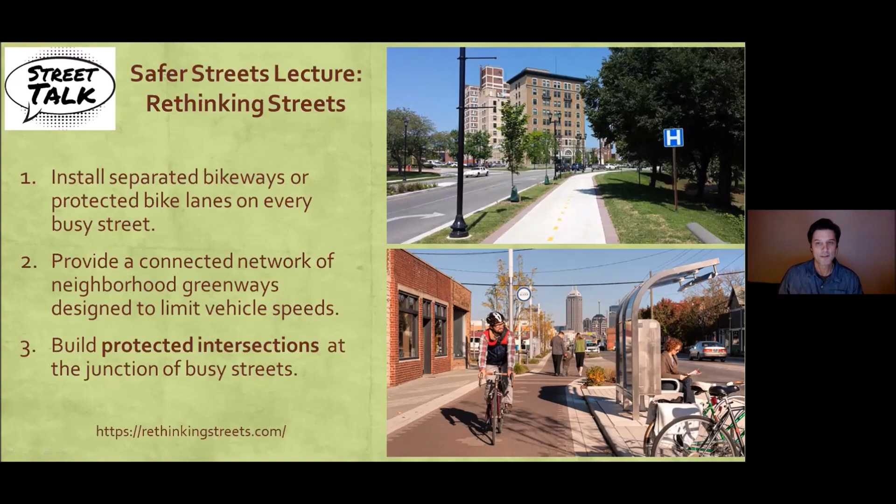In their collision reports, the police recorded the human behavior that led to the collision. Two-thirds of them were caused by a motor vehicle driver making a mistake at an intersection and striking a person walking or biking. We could focus on that human error, the mistakes the driver, the cyclist, or the pedestrian makes. In fact, that's what a lot of traffic engineers do after a crash or a collision.

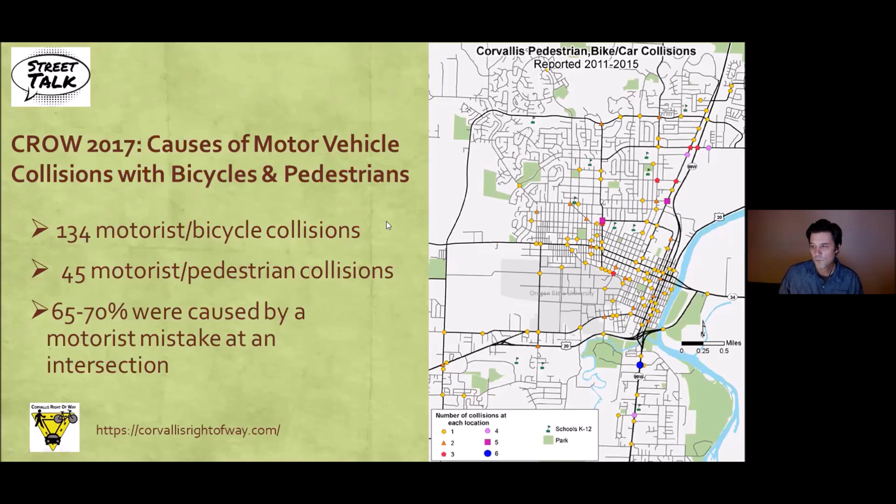But instead, I'd like to refocus our attention on a fundamental safety principle of the Dutch Institute for Road Safety Research. Humans make errors and willingly or unwillingly break rules. This is a given that cannot be changed. So roads and streets should be designed in such a way that this natural human behavior does not lead to crashes or injuries. So how can this safety principle be applied to the design of intersections?

How does a city even begin to implement intersections that are safer for everyone and encourage biking and walking? Well, these are perfect questions for our street talk speaker. His talk is entitled Intersections for People: Design, Implementation, and Community Benefits.

When I asked local experts who I should try to get to give a talk about intersections, they all said, get Nick. Nick Falbo is a senior transportation planner at the Portland Bureau of Transportation. He specializes in the design of urban transportation networks, spaces for people, and multimodal complete streets. Nick contributed to and illustrated the NACTO Urban Bikeway Design Guide, which is the standard for integrating bikeways into the fabric of American cities. He has popularized the design concept of protected intersections for bicyclists and serves as guest lecturer at the Initiative for Bicycle and Pedestrian Innovation at Portland State University. I'm very pleased to welcome Nick Falbo.

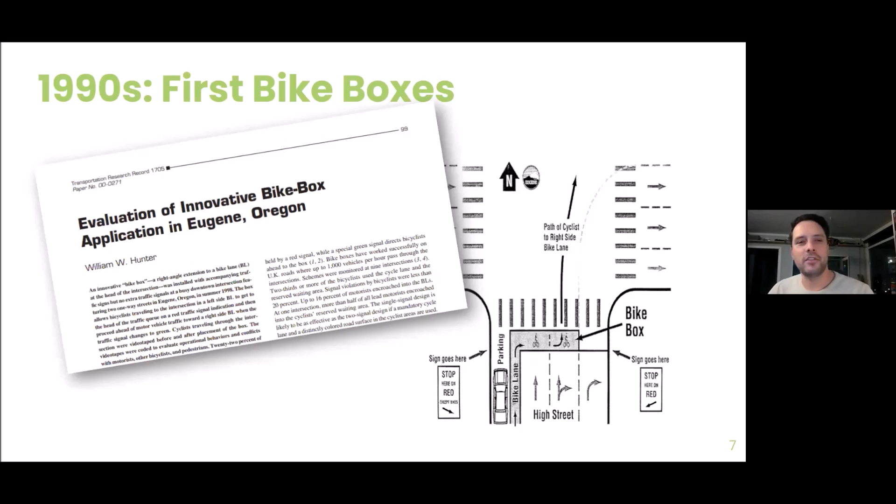It's probably the reason Corvallis has many of the bike lanes on its arterial streets today. In the 90s, cities like Eugene were experimenting with bike boxes as a traffic safety feature to improve bicycle transportation. Also around the turn of the 90s and 2000s, Portland was leading the way with experiments in colored bicycle lanes. For those of you who were around, we had blue bike lanes back then, following the Danish model. The evidence built by this work supported what is now the color green for bike lanes that we're seeing in cities all across the country.

And now we're trying to just follow in those footsteps in bringing more innovation into our cities. Since being pitched in 2014, this design has really taken off with official endorsement by FHWA and a little bit of an arms race among cities to incorporate this protected intersection design into their projects.

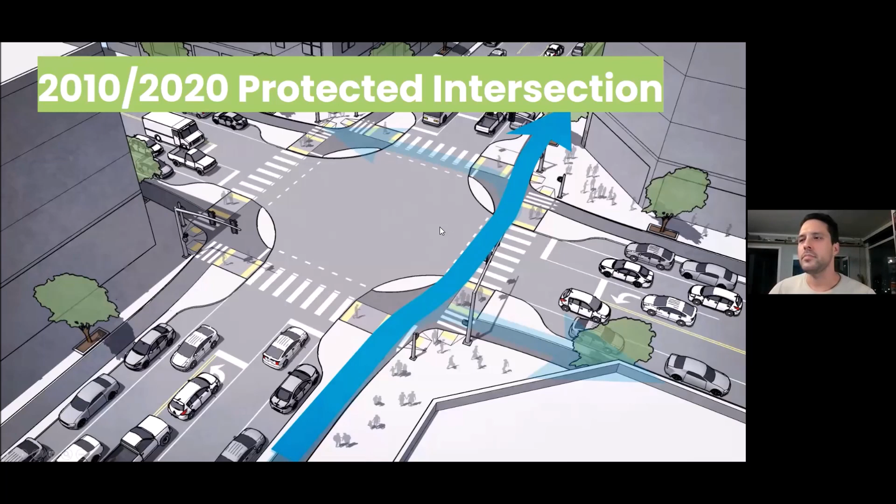But in our quest to design for the future, I find it really helpful to center ourselves in the past, to understand where we came from and how we got to where we are today, and what that means about where we can go in the future.

To illustrate this, I've got a chart dug up from a report in 1970 or 1972. This chart shows the relative usage of transportation modes in Portland for 150 years, since the beginning of the city in 1840. It was developed as part of a freeway environmental impact statement. Each line represents a different mode of transportation as it goes from the beginning of Portland to what was the present in 1970, or maybe 1974.

You can see the beginning of Portland, it's all pedestrians, horses, and boats. These modes shifted and grew as the city expanded. But then technology changes introduced other modes of transportation. Around 1870-1880 was the rise of railroads that helped connect cities, and the streetcar that helped expand cities. That had a rise until around 1920, peaking as the heyday of the streetcar era, then dropping back down and being replaced, in this case, by automobiles.

This was developed as part of the plan for a freeway. It had a goal, which was to convince you that the domination of the automobile was undeniable and inevitable. And this empty space here leading to 1990 really begs you to fill it with more cars and less of everything else.

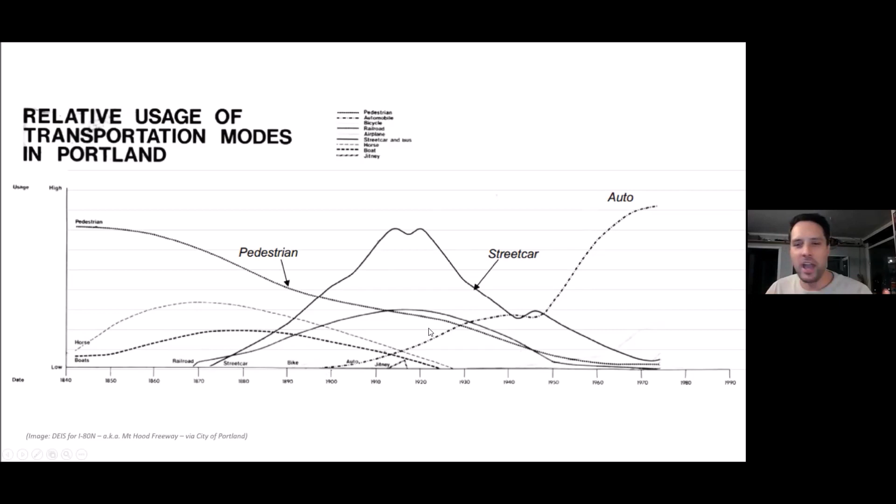But I take away a little bit of a different story from this chart. I see a story of change. I see that cities are changing all the time, and we get so lost in what feels like the status quo that we forget stability is the exception. I also notice how fast things can change. Within a lifetime, whole ways of traveling basically vanished and whole new ways of living emerged.

So I asked, well, what comes next? I really love this chart, and I wanted to see what happened since 1970. So I dug up some census data to try to figure that out. And while the original chart wasn't necessarily a scientific chart, it actually seemed to track pretty well with what I was seeing in census numbers.

So I filled it out, added the gaps where I could, and then extended it even into the future. This is pulling out lines that I've then projected to the city of Portland's mode share targets for the year 2035.

And what this tells me is that there is hope. History tells us that things can change quickly, and some of our mode share targets for the city of Portland that maybe seem a little crazy, when put into the perspective of the last 150 years, look a little more realistic.

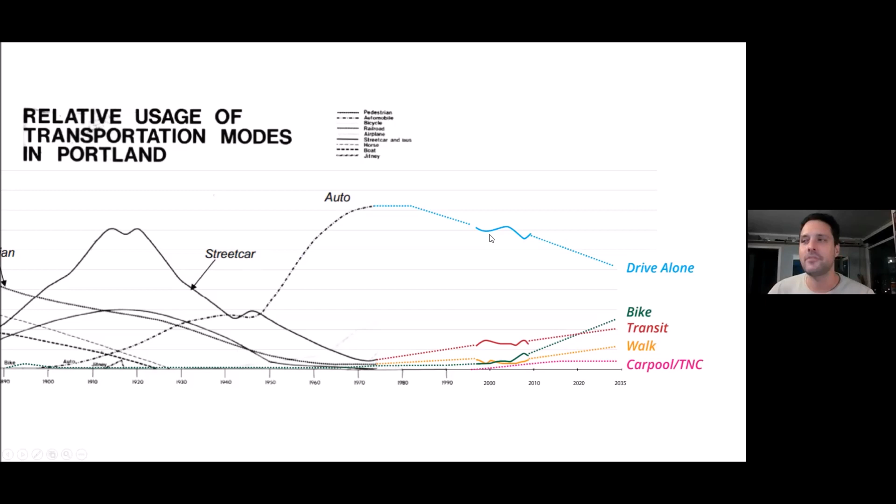These were the types of ideas and infrastructure that we started to experiment with in the 70s, and we've been talking about it for 50 years. These experiments were quickly abandoned and then largely forgotten. Not only that, we started to document these ideas also in a way that has largely been forgotten.

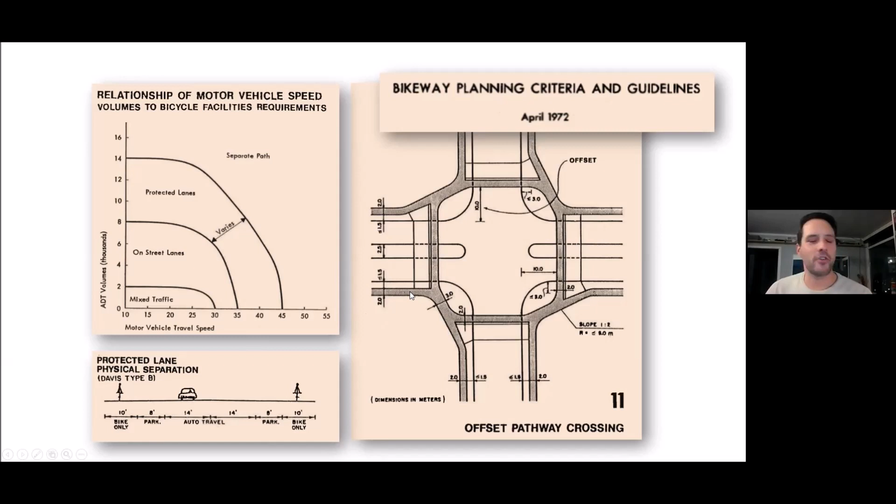This was something that people had been thinking about, and it hadn't quite landed. I would like to think that we're now in a position to move forward with these ideas, but it's very humbling to see where these came from and to know that we're building on the back of a long history.

Our objective right now in transportation planning and design is often geared at trying to reduce the impacts of driving or to reduce driving itself. Whether your cause is traffic safety, pollution, urban noise, or global climate change, dependency on driving is the problem. And designing streets and intersections where transportation outside of a car is safe, available, and attractive is the solution.

To do this, we need to start approaching things differently when we're doing transportation design. We need to switch from a passive approach to street design to a proactive approach. The NACTO Urban Street Design Guide describes how these approaches are different.

Passive design is built on our understanding of the present and our patterns from the past. It uses past traffic counts, present traffic counts, and projects out to the future. We design for the worst case scenario in terms of traffic or user behavior, and we design based off of standards rather than the context we're in.

And the traditional rules are full of self-fulfilling prophecies, having to do with clear zones that try to make us safer but just make us go faster, or 85% speed rules that let us increase the speed limit because people want to drive faster, creating a never-ending feedback loop.

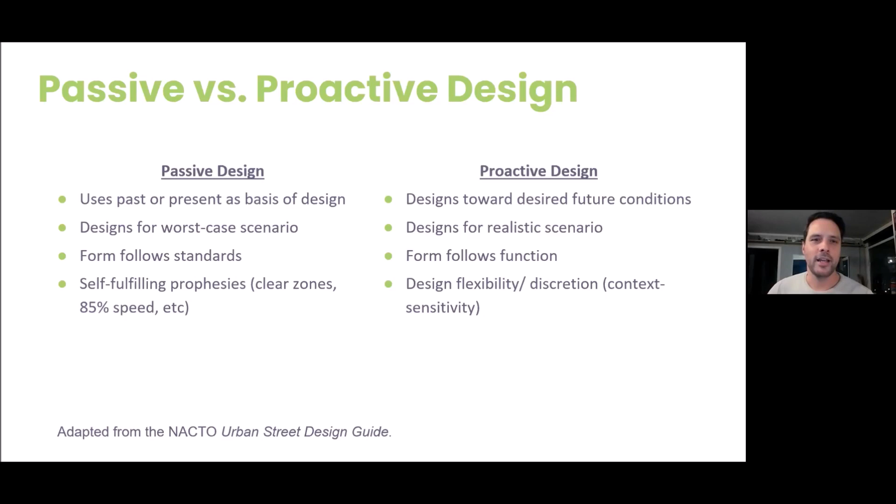A proactive design is much more intentional, and it starts to turn these on their head. I think the most important element to start shifting towards is to design toward the future conditions that you want. We need to be saying that we want more people walking and design a street that would encourage more people to walk. We need to be saying that we want more people biking and design a street that encourages more people to bike.

Like stormwater engineering, where you need a big pipe to move the extreme amount of water for a one big day event, or architecture where you're designing for potential earthquakes. But it's disastrous when you apply these ideas to normal city streets.

Over-designed buffers, clear zones, and setbacks are not only designed to account for crashes, but they end up encouraging unsafe speeds and create more dangerous crashes than ever before.

But proactive design recognizes that human behavior is what governs traffic engineering, and that it is fundamentally adaptable and not fixed. People adapt to their conditions. Changing streets changes behavior. And designing for the fastest is creating more fast drivers.

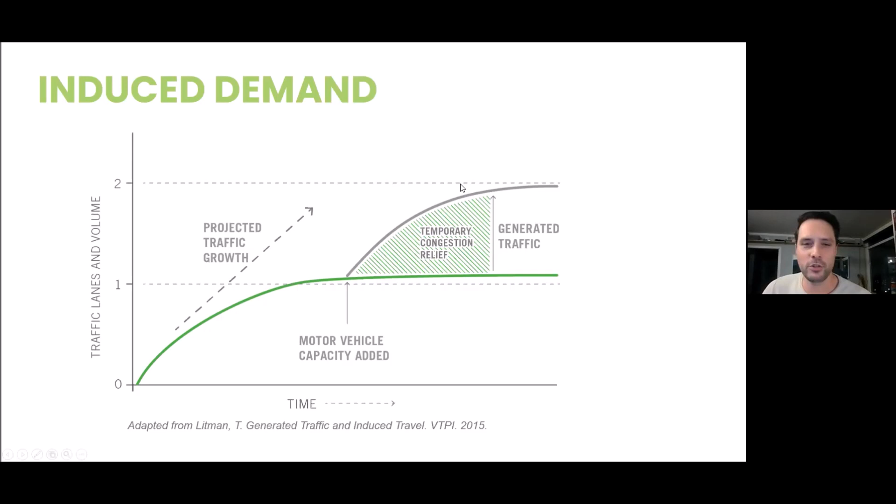These projects offer an illusion of relief at first, but are quickly filled up with new people and new trips. This shows motor vehicle capacity at a one-lane street, but with projected traffic growth, more than this street can handle. Had we just left it alone, that traffic growth would never have shown up. But by building for this future, we get this future.

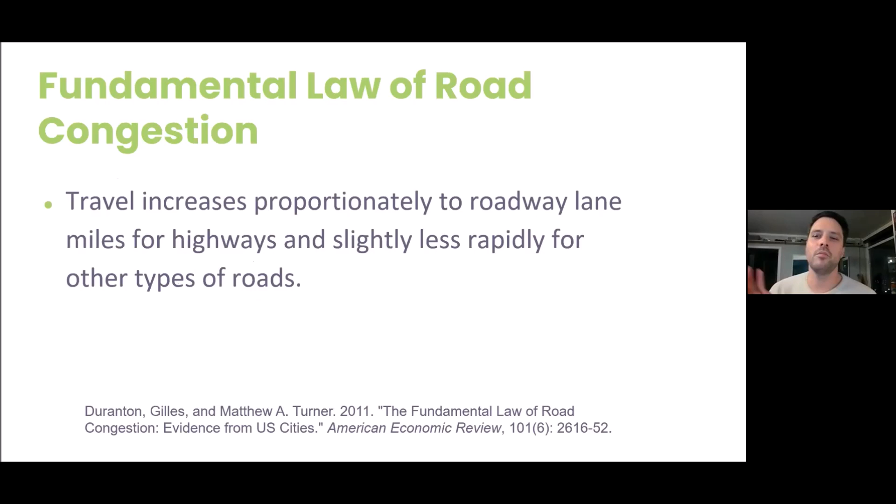This has been studied so much that it's called the fundamental law of road congestion. Travel increases proportionately to roadway lane miles for highways, and slightly less rapidly for other types of roads. When you expand roads, you get more traffic, and now we're just as congested as before, with even more motor vehicles on the road and everywhere else in your city.

Maybe the poster child for this is the Katy Freeway in Houston, Texas. This is incredible - they widened it from 8 lanes to 23 lanes for a cost of almost $3 billion. The goal was congestion relief, but it didn't work. After construction, travel time along the corridor increased by more than 18 minutes, a 33% increase over pre-widening travel times. Now they have more people stuck in more traffic.

While this is a big project and we can understand how big projects can influence people's behavior in a big way, this same general philosophy applies to our local streets as well. When we've got an arterial street and a big intersection, the more we're facilitating auto movement, that contributes to the very same dynamic as this freeway widening - easing the mode of driving while simultaneously making everything else that much worse. So the real question is, can this work in reverse?

Can we go from induced traffic to reduced traffic? This is sometimes called traffic suppression, traffic evaporation, or disappearing traffic - the intentional reduction of lane capacity on congested streets as a way to limit and reduce traffic in our cities, and most importantly, to free up space for multimodal mobility. This isn't just a normal road diet. Road diets are great and we need to be doing them, but they're generally only recommended in areas where traffic volumes aren't too high and the impacts are small.

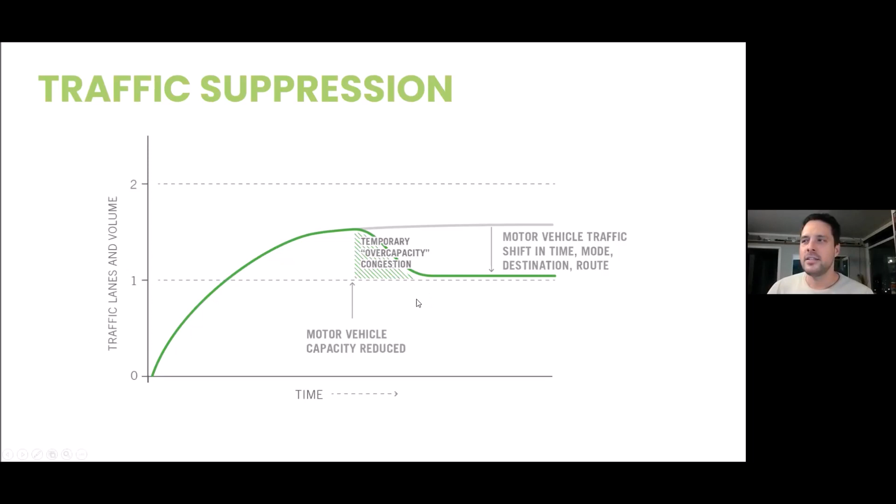This has been studied quite a bit, mostly in the UK. One study in particular, led by Sally Cairns in the early 2000s, looked at over 60 examples of motor vehicle capacity reductions in congested corridors. She looked at construction projects - long-term projects that reduced capacity of major roadways to see what would happen. She also looked at disaster projects, like in San Francisco, where a whole freeway collapsed during the 1989 Loma Prieta earthquake.

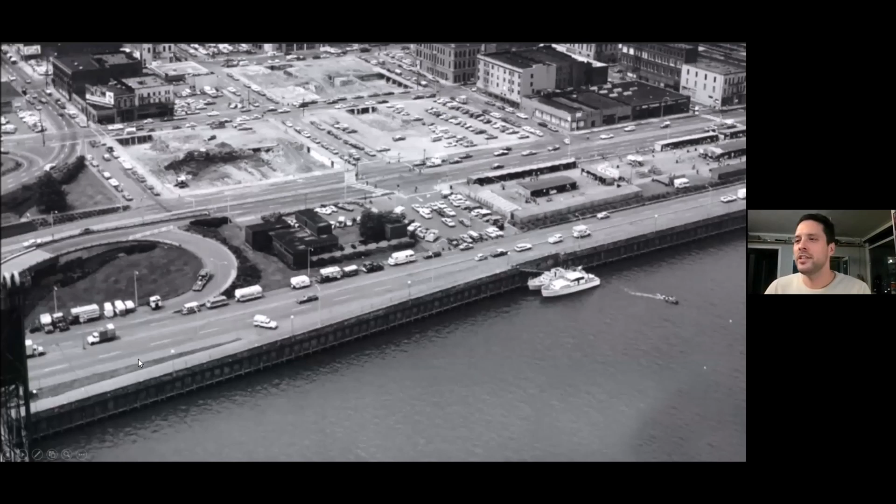It was replaced with a street that carried far less traffic. She also looked at intentional policy choices. We've got a great example of this in Portland, where we removed Harbor Drive Freeway along our western waterfront. In 1968, the road carried 25,000 vehicles per day. It was expected to increase to 90,000 by 1990, but they removed it in 1974, and in its place built a wonderfully loved park. Rather than seeing more traffic onto adjacent streets, the removal saw 9.6% fewer motor vehicle trips across downtown bridges.

Her study identified the following conclusions: when road space for cars is reallocated, traffic problems are usually far less serious than predicted. Overall traffic levels can reduce by significant amounts - she notes anywhere between 25 to 50% of the diverted traffic appears to simply vanish from the network. People react to changes in road conditions in a much more complex way than has traditionally been assumed by traffic models. We need to treat people as the more flexible people that we are, and we make rational choices in the face of rational changes.

I'm sharing this with you because we really need to find ways to wrestle our cities back from cars. We're going to have to make hard decisions and move into a new way of thinking about what kinds of change is possible.

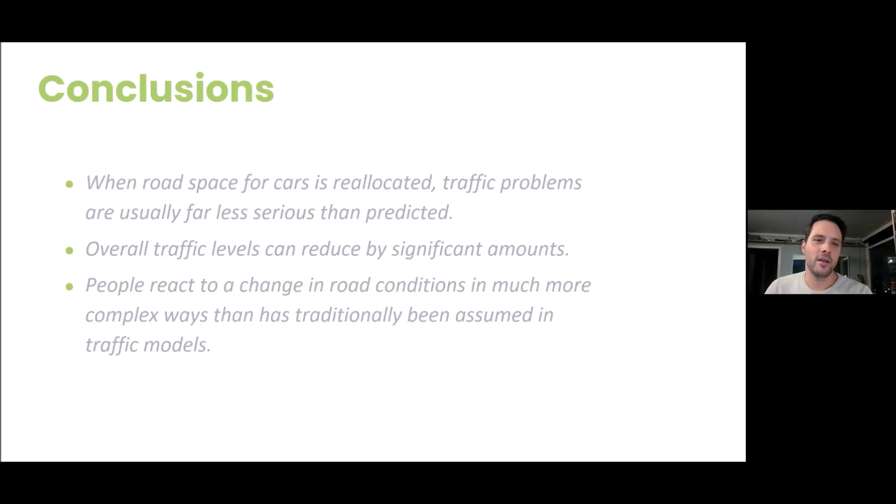So getting back to bicycling and intersection design, guiding our work in Portland is the belief that bicycling should not require bravery. This was coined by Portland's bicycle coordinator, Roger Geller, in his paper, The 4 Types of Cyclists, published in 2009. In this paper, he sets the foundation for understanding not just what we're designing - protected bike lanes or neighborhood greenway streets - but more importantly, who we're designing for.

Today, his framework is fully endorsed by the FHWA and verified nationally by researchers at PSU. It breaks users into different types of bicycle riders: the interested but concerned, the somewhat confident, and the highly confident. These groups have varying degrees of stress tolerance, and you can really see their makeup on our city streets today. Most cities are really only operating in this highly confident territory because they don't have a built-out network that is lower stress.

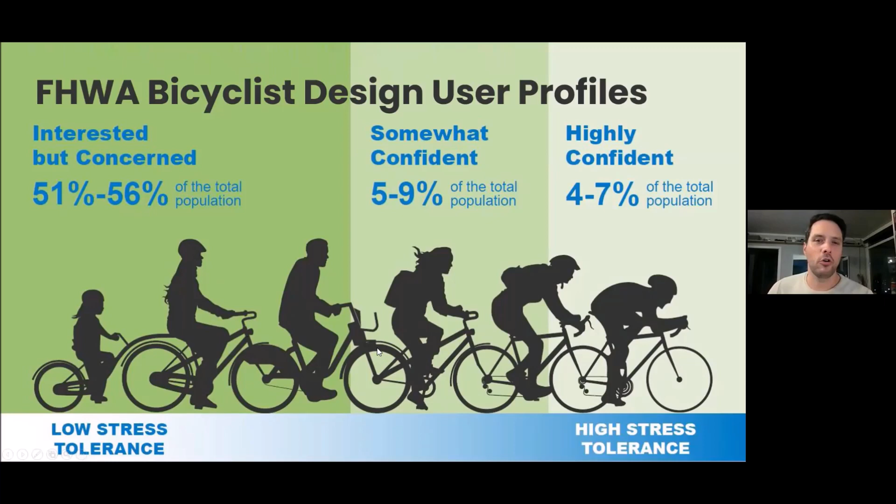A lot of bike-friendly cities have embraced the somewhat confident riders, Portland included, which is a growing share of the population, but really we're not quite getting there yet. The key to a transformative future is attracting the interested but concerned to our streets, and they require low stress facilities. The interested but concerned includes everyday people doing everyday things, running errands or going shopping. You've got kids traveling independently. This is where we're going to be meeting the needs of the majority of people in our cities.

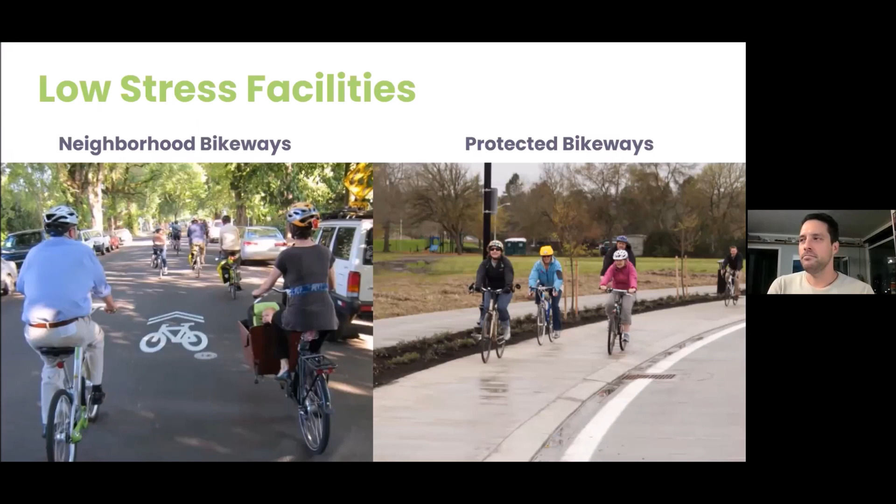To reach this crowd, it really leaves us with two options. We've got neighborhood bikeways for our residential streets, our neighborhood streets, and protected bikeways for our busy streets. Protected bike lanes are located next to the road and physically separated, providing people with the confidence to bike to work, school, markets, parks, and restaurants, or just explore on the weekends. This passage comes from People for Bikes and their Activating Support for Bike Infrastructure resource page.

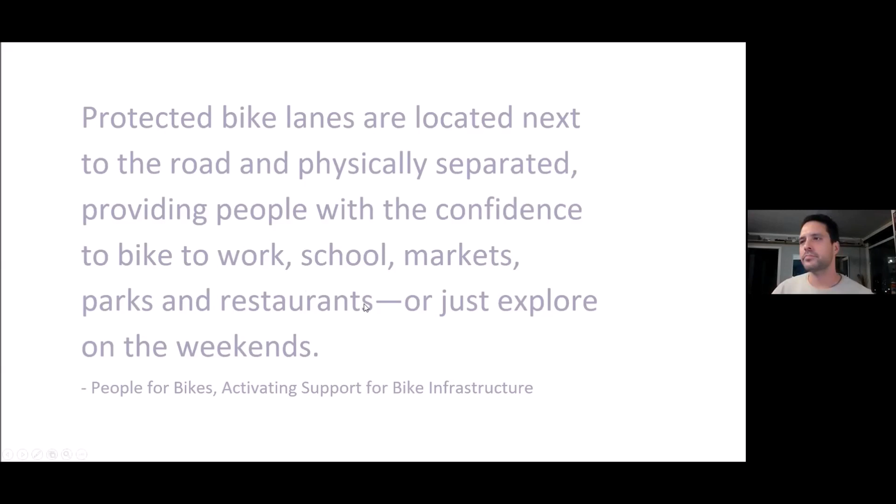It's got great messaging that you might want to think about adopting as you're talking with the community about why these types of facilities and intersections are needed. But we know we can't just build one or two great protected bike lanes. We need to create a network that connects people from where they are to where they want to go. To illustrate this effect, I'm going to point to Portland.

In 1990, our bike network was minimal, and so was our bike ridership levels. The network, which you can see in these black lines across the city, didn't connect very well, and you couldn't get to everywhere you needed to go. The densest part of our network development was in Southeast Portland, which is also where bike commute activity ended up being the highest. After 20 years of intentional development of new neighborhood greenways and new bike lanes, everything changed.

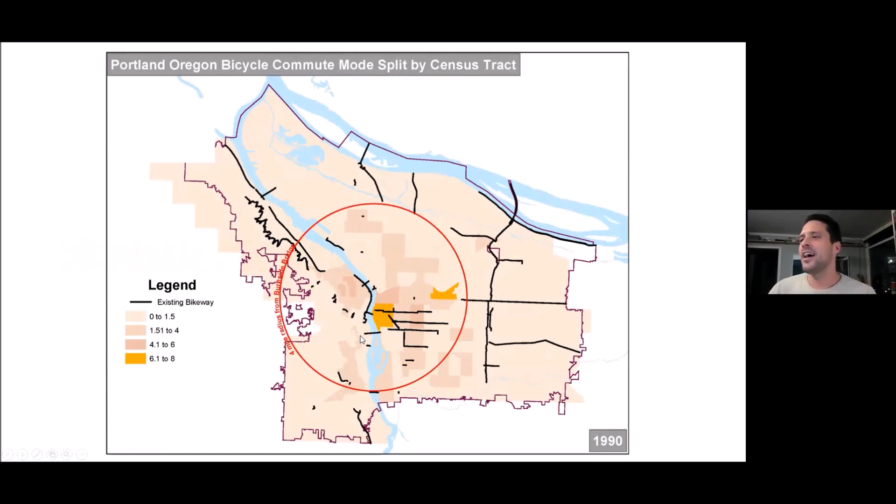By 2012, we'd done a dramatic expansion of our bikeway network in these inner neighborhoods, and came along with it a dramatic increase in bicycling within this area. It's pretty incredible. Some of these neighborhoods clock over 25% bike commute mode share. This is an incredible statistic, and it's on par with some European cities. You can see that where we're building the network is where we're seeing the riding.

I think our next frontier is East Portland. We've been spending a lot of time trying to build out in the more suburban development portion of our city. These black lines, a lot of these are skinny painted bike lanes on arterial streets, on 5-lane streets, and they are not doing the job. That's pretty clear just from a map like this. So we're doing a lot to try to upgrade these facilities to bring low stress bicycling into the area.

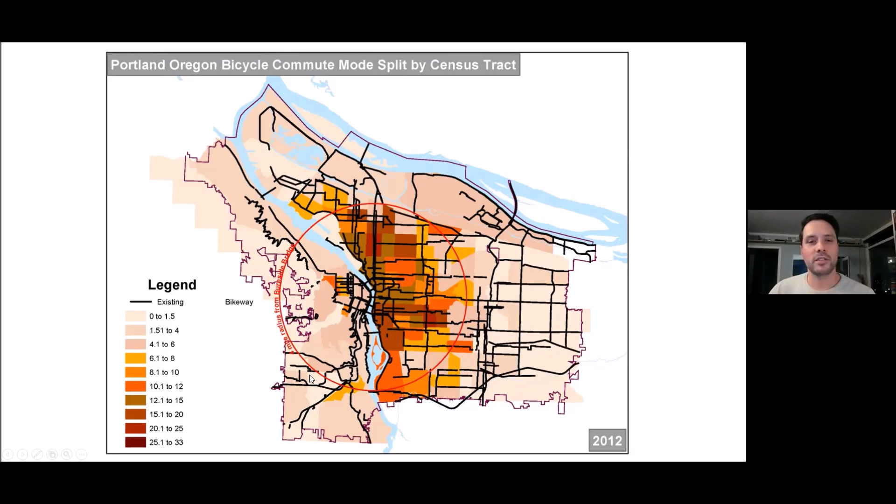This is really the challenge for Corvallis. With luck, we'll start to see these types of networks of connected, protected bike lanes and neighborhood greenways built here. The blue lines are all kind of local streets that could be calmed to become neighborhood bikeways. These red lines are your busy streets, your high stress streets. These are the streets where we're going to need to work to get separated bike lanes to create a street that feels safe for everyone.

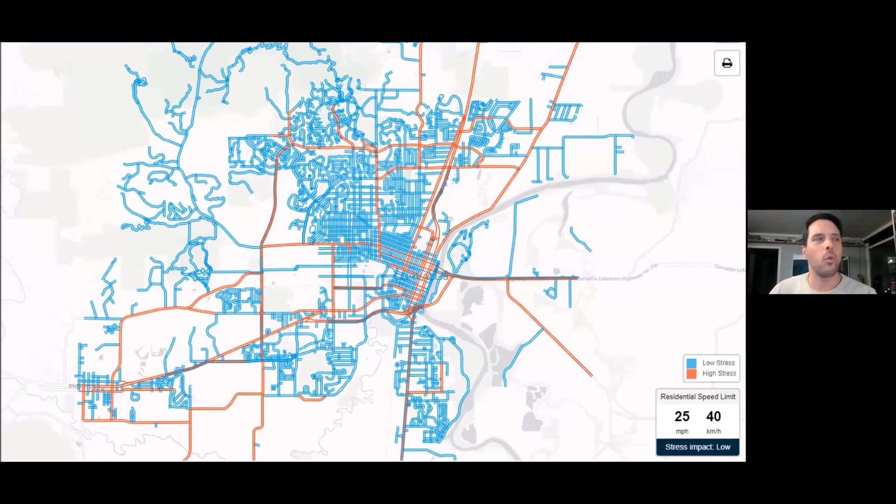As you start to build out this network, you're going to run into questions about what do you do about the intersections. This is where we get into intersections today. Even the best road diet or bike lane can lose their benefits when you get to an intersection. Intersections at their worst really ruin the facilities that they're on, and they're not great places. Intersections can be confusing, often with a lack of clarity about how you get to where you're going. This is especially true for people walking and biking.

If you're on a big, busy street, how do I turn left? How do I make this connection? How do I get to this path across the street? They can be stressful with activity coming at you from all sides. You can feel exposed with long crossing distances to cross these wide multi-lane arterial streets. And they can also be dangerous places.

In Portland, 71% of all pedestrian crashes occur at intersections, and 44% of all pedestrian crashes occur at signalized intersections. We often think of signals as maybe the answer to a lot of our safety problems, but signalization alone is not necessarily going to fix the problem. This reality really drives Portland's Vision Zero initiative, which has identified our most dangerous intersections for prioritization of safety fixes.

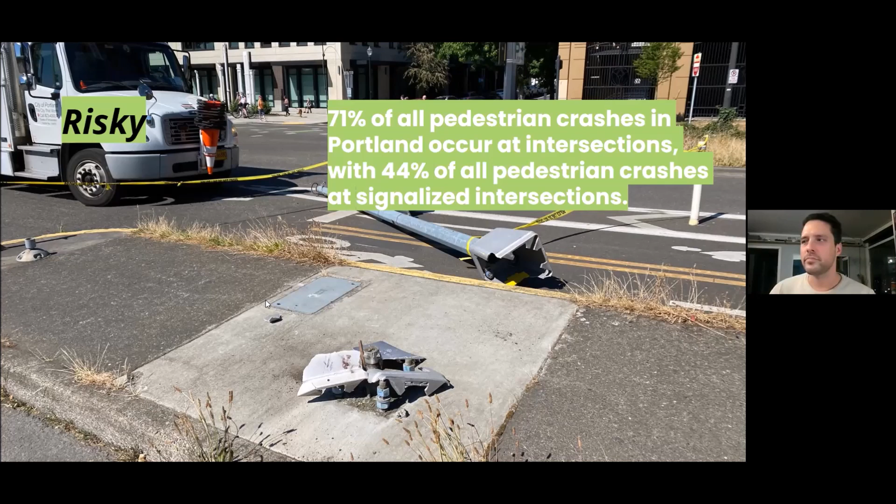Intersections can also be places where people are breaking rules, maybe intentionally, maybe not. How many of you have tried to cross the street and had no driver yield to you so you could safely cross? A study out of PSU found that poor yielding rates are common. Drivers don't yield to pedestrians in general, and they are even less likely to stop for and more likely to crowd Black pedestrians. This becomes a real issue of equity in engineering. We can design a crossing to create more yielding and more equitable outcomes, and we should.

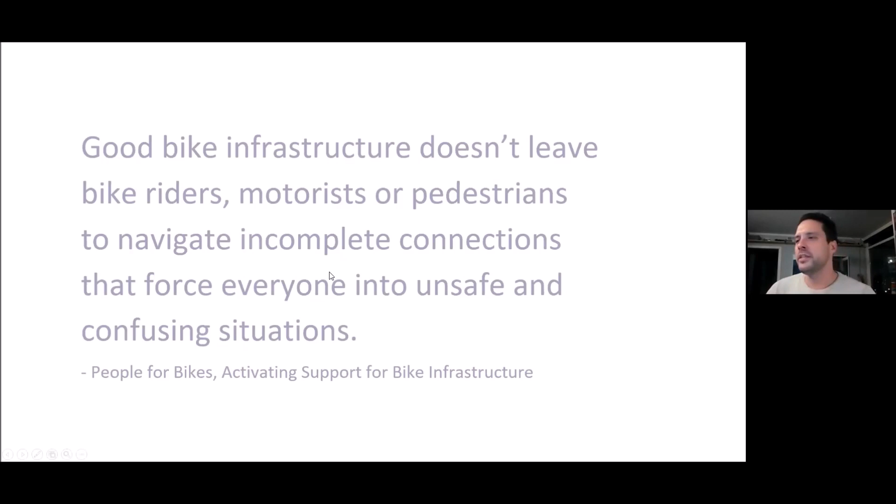So today we're here to talk about not giving up at the intersection. Good bike infrastructure doesn't leave bike riders, motorists, or pedestrians to navigate incomplete connections that force everyone into unsafe and confusing situations. Too often that's exactly what we do. It really doesn't matter if you've got a great protected or buffered bike lane, if the protection and markings all go away at intersections and you're left to fend for yourself.

There are 5 core intersection design principles to keep in mind when developing, reviewing, or commenting on intersection designs. We often don't get these things right. It's not always easy, but this is something you can use as you're evaluating the work being done in your city. The first is to provide adequate sight distance—you want to give people walking, biking, and driving a chance to see each other. But when your vision is blocked by parking or you don't have the space, you don't really have a chance to do the right thing, to stop fast enough, or to even realize you should be looking.

And secondly—you want to minimize exposure to conflicts. We do this often by narrowing the roadway or the crossing, by simplifying the crossing to minimize any mixing and sharing on our busy streets.

You want to reduce speeds at conflict points. Some busy streets have high speed limits—that may be okay for uninterrupted stretches, but it's not okay in areas where people are mixing or sharing with people biking. It's not okay where drivers are turning across pedestrian crosswalks at high speeds. Slower is safer, and by slowing speeds down, you give everyone the chance to react.

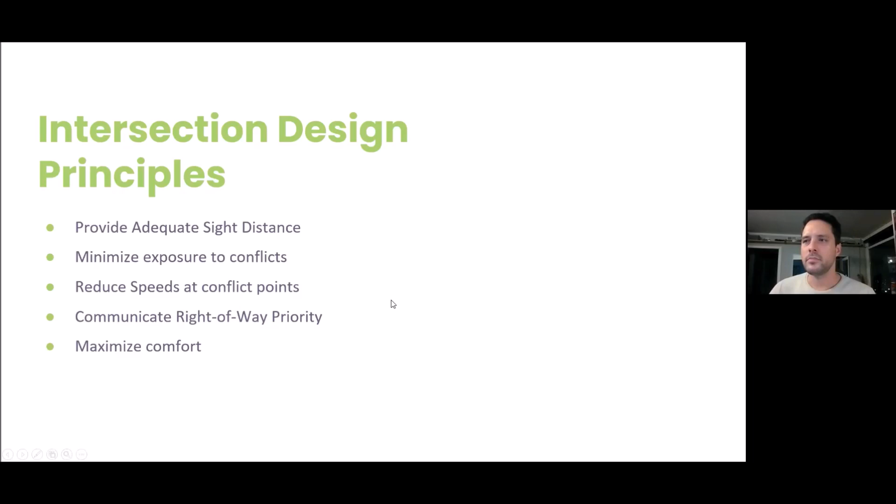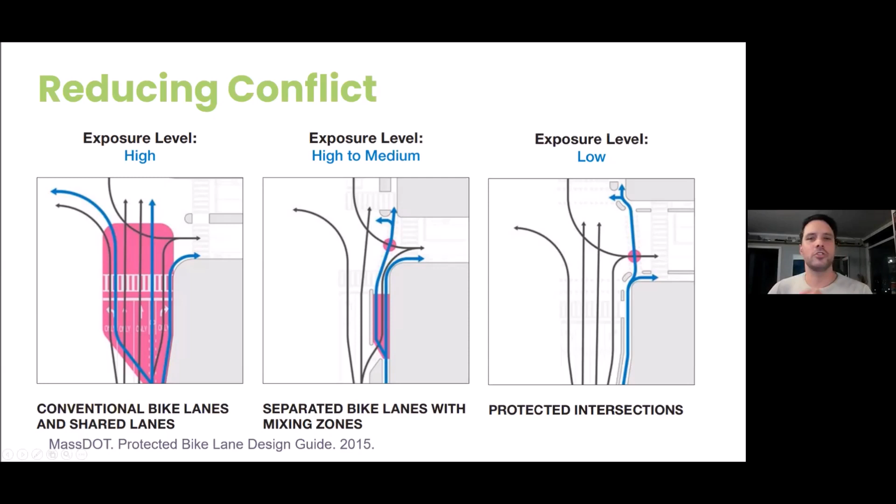Well, the first thing you really should do, if you can, is put this road on a road diet. We're not going to be able to create the world we need if we're constantly widening roads or leaving ourselves just the crumbs to design with. I think you'll find that most of our streets have enough space. We're just using it in the wrong way.

So let's do a quick analysis. What's wrong with this and what do we do about it?

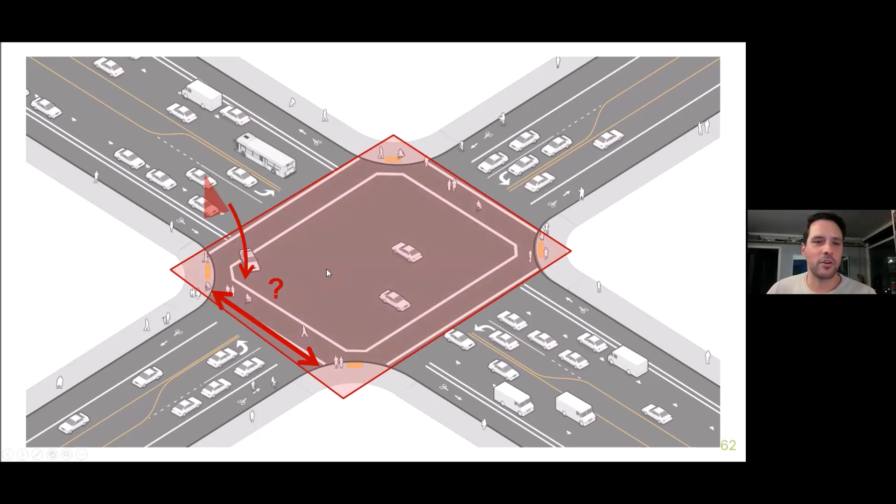And in general, it has a lack of clarity about priority. We've got a nice marked crosswalk here, basic crosswalk markings, but I don't know if that fully clarifies who is supposed to yield to whom for most drivers on the street. Overall, it's just a relatively uncomfortable place to be outside of a car. And I'm sure you can think of dozens of intersections in Corvallis that look just like this or feel something just like this.

So how do we build in these design principles to reduce risk and bring benefits for everyone? The good news is that we can solve all of these problems, and we can use the space from the road diet to install protected intersection safety features. Let's bring those principles in and see what we can do to make this a better street.

The first thing we want to do is pull back the parked cars from this protected bike lane to improve visibility. If we can, we want to pull forward the people waiting at the intersection to increase visibility even further. We also want to physically narrow the crossing to minimize exposure when crossing the street. Just down to the bare minimum, what is the actual zone of the street that has the threat of motor vehicles? Let's minimize it to that, and that should be our crossing distance.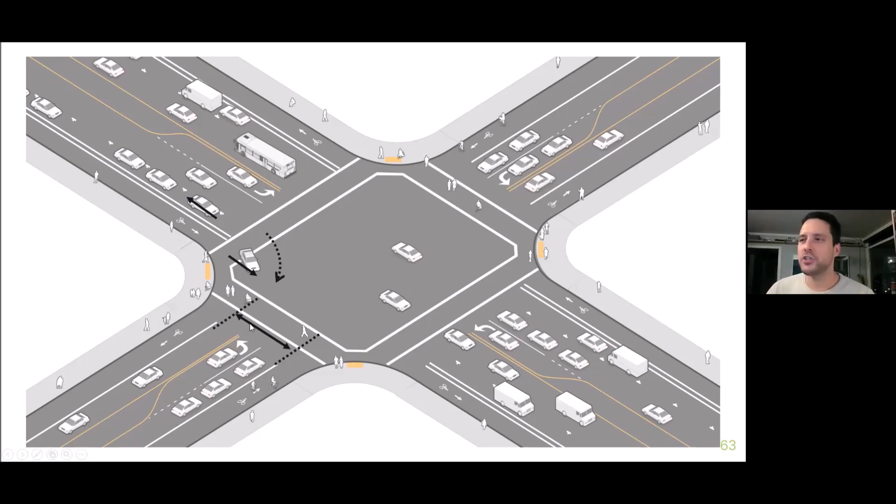We need to better define this corner, especially now that we have all this extra space. This will help us manage speeds. A wide open corner lets you turn at high speeds, but a tight corner does not. And we need to mark this more clearly for the walkway and the bikeway to indicate who has priority.

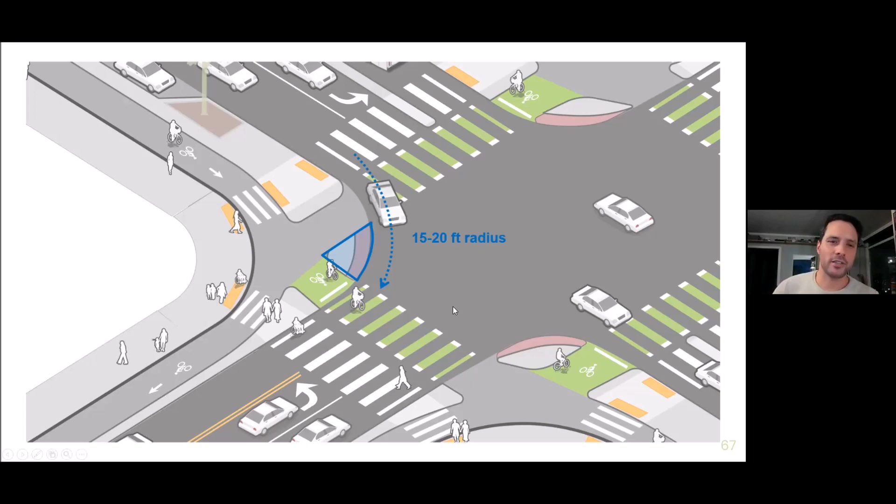We also need to deal with turning speed. The corner safety island provides protection for people waiting at the corner, but it also slows down turning cars by defining that turning radius. We recommend about a 15 to 20 foot radius, which is perfect for passenger cars in an urban condition, but it's not that good for large trucks. This is one of the points we really run into a lot in urban areas: how do we design for a passenger car, which needs a tight corner for slow turns, but also accommodate large trucks that we rely on for deliveries and large vehicle access?

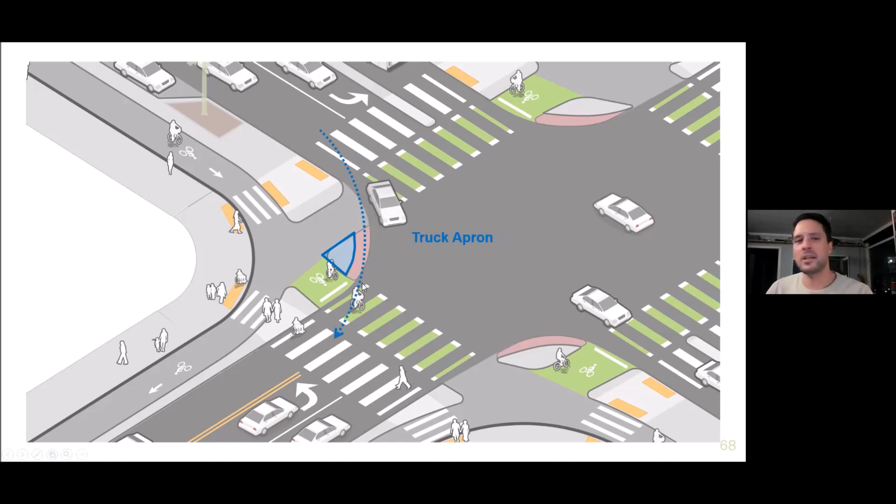Well, the trick there is to use a truck apron, so you get a smaller island defined for that truck. A passenger car would go around this pink area, and a large truck, if needed, can mount this part of the island to make that turn. It's this type of smart design that lets us meet both of these potentially competing objectives.

The corner island also helps with yielding by creating a wide separation distance between the travel lane and the crossing for people walking and biking. The sweet spot here is around 16 feet of depth. That's actually enough room for a whole car to turn and stop and wait without feeling a lot of pressure behind them. But studies have shown that there's a safety benefit to this design in as little as 6.5 feet, which means this design can fit on a lot of your bike lane streets today.

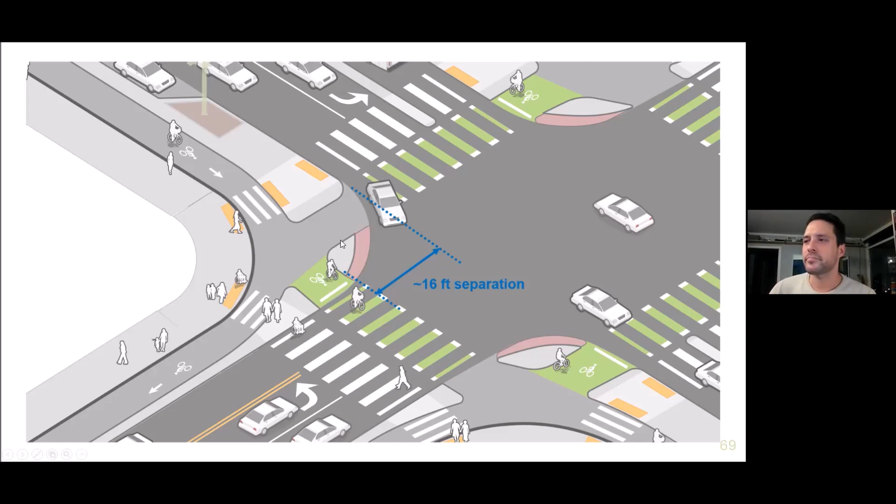By forcing the car to turn before the crossing, it really changes how users interact with one another, and it gives people walking and biking more physical priority at this intersection. It also gives drivers the chance to see and stop. Even those drivers who weren't looking before the turn, they'll see you when you put them in a design like this.

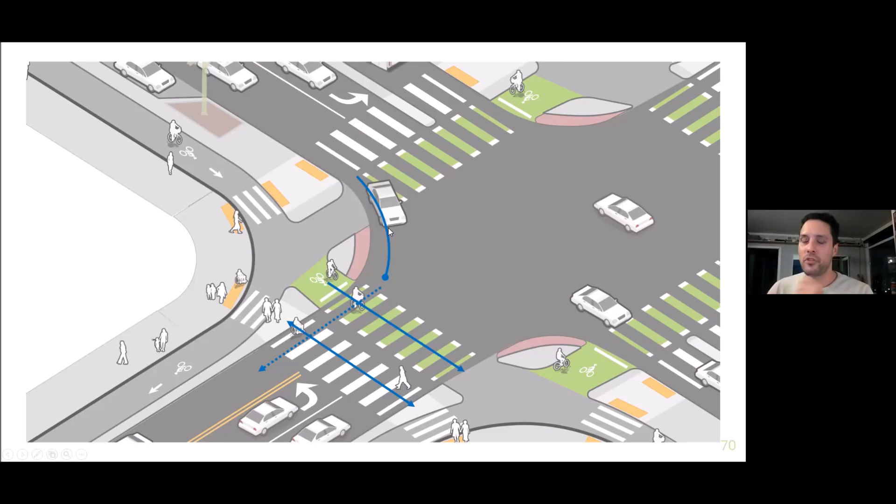This extra space can also be used to maximize comfort for people in general. As an added benefit, we can enhance transit on a corridor like this. You can build floating transit islands to create a better stop experience. There's more room for shelters, benches, and landscaping. Other features such as bike parking can be added here to create a type of mobility hub for people connecting to transit.

And the extra room on the street could also be used for things like trees or other landscaping, to bring more beauty and nature into our streets and into this space. So while this may look a little bit like an alien intersection design at first glance, it's becoming more and more familiar all across the country.

We have a couple of these in Portland, and I'm going to try to lay out some rules as to when you should be considering a protected intersection design, where it fits well, so you can know where to use them as you're evaluating potential places in Corvallis to bring these treatments.

The application for protected intersections is generally a tool for busy streets. You want to put this on arterial streets or collector streets. It's not the type of design that you'll bring to your local neighborhood bikeway.

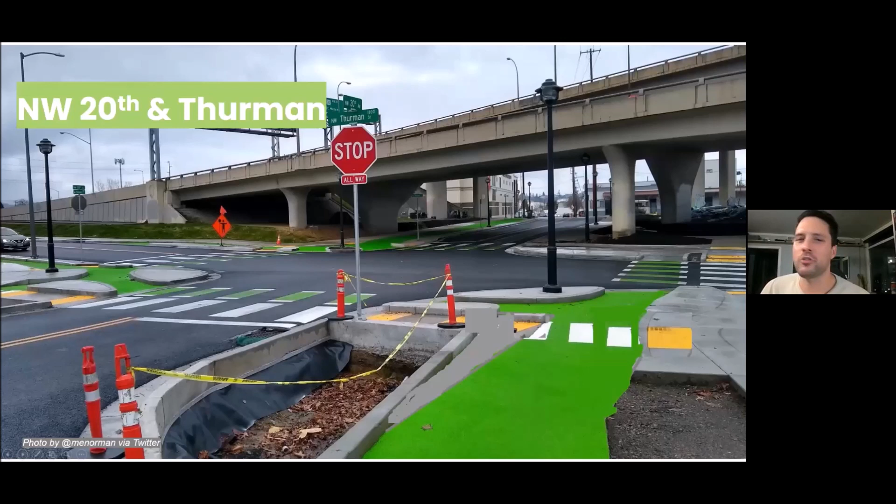Here's what it looks like on the ground. You'll notice it's a stop sign intersection. This is a little bit unconventional. There's not a lot of these stop sign protected intersections, but they work, and they help you make that connection. You can see there's that two-way connection under the freeway that lets you circulate between the multitude of different bikeways that connect on this intersection.

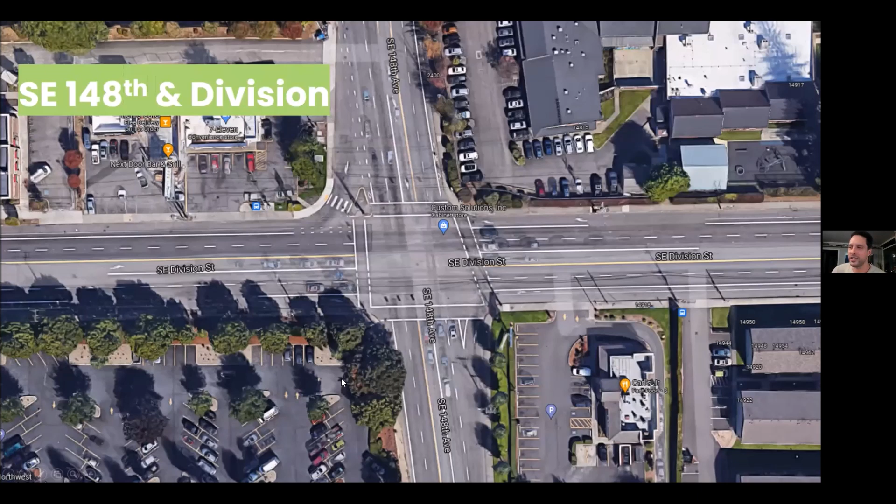But where they really shine is on large streets, on big streets. This is a large arterial street in East Portland, 148th and Division. As part of a transit project, we were also upgrading the intersection, and we said, if there's any place to try a protected intersection, this is it. We've got the space and width here, and we've got the room, in particular where we had these extra added turn lanes and slip lanes. So we just claimed this outer portion of the roadway for ours and turned it into a protected intersection space.

Quick build design is a little bit tricky. It maybe is tough to maintain in the long run, but if you're trying to get those safety benefits sooner rather than later, this is a good way to do it.

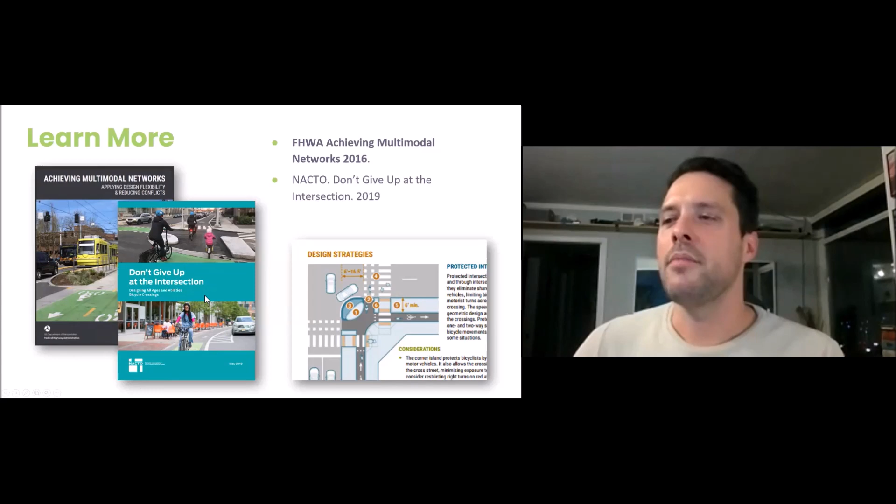There's a lot of guidance out these days. The last few years have really been a huge boom in terms of high quality guidance for building low stress intersections and low stress facilities. I really like the FHWA Achieving Multimodal Networks guide. It's a really good resource for, in general, improving walking and biking conditions. And NACTO has published Don't Give Up at the Intersection, a guide to designing protected intersections and other key features.

So as you move forward in Corvallis, trying to build a better bikeway network and safer intersections, I wanted to give you some recommendations from up in Portland, what has been helping us as a community to advocate for these things.

First is make friends, build a broad constituency with Safe Routes to School, with AARP, with other walk and bike advocates. I heard someone say the other night, build relationships, even if you're not yet building infrastructure, because those relationships are what's going to help you get to where you need to be. You want to be able to articulate the problem, really focus on shared concerns and messaging. Traffic safety affects us all, and solutions can support safety and mobility for all. The more we can have a broad tent in terms of a shared vision for the future, the farther we can take things.

It helps to identify top priorities when you're organizing around improvements. When everything's a priority, nothing becomes a priority. It's really a long game when it comes to advocating for change, and so knowing where you want to focus your energy really helps. Data-driven identification of high crash intersections, like what Steve shared earlier, can really help focus energy on those shared concerns and pick which of those intersections are the worst, and make sure that those get fixed next.